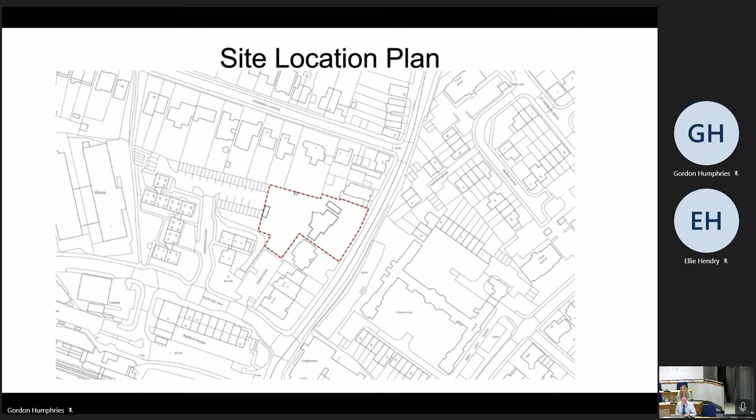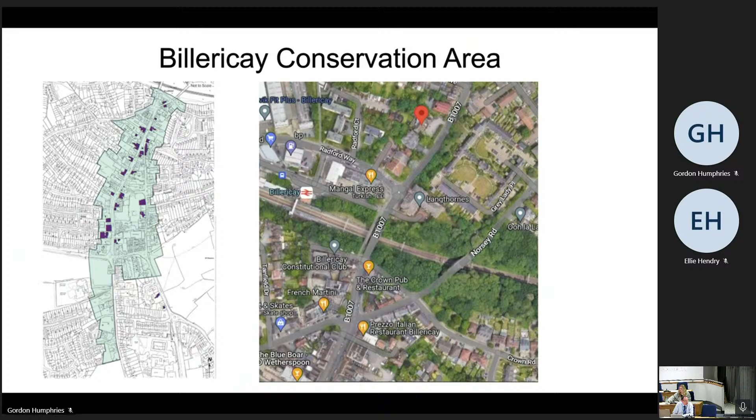So the proposed development - I should say it's a revised scheme to an earlier scheme that was refused by the committee for 30 flats in 2 4-storey type blocks of flats back in April 2023. And the scheme now submitted seeks to address the reasons that led to the refusal of that scheme. The reasons for refusal of that scheme are set out on page 198 of your agenda.

So the current scheme comprises a 4-storey block of flats at the front of the site, comprising 20 1, 2 and 3-bed flats, and a row of 4 terraced houses at the back in a mews type arrangement.

All dwellings will meet or exceed national space standards. 10% would be M4(2) accessible and adaptable dwellings. There's no on-site affordable housing proposed, but an off-site affordable housing commuted sum of £74,400 is proposed to be secured by a Section 106 agreement. A financial viability assessment has been submitted with the application. 13 car parking spaces are proposed, including one accessible space, 2 powered 2-wheeler parking spaces, cycle parking, and electric vehicle charging points to be dealt with by building regulations.

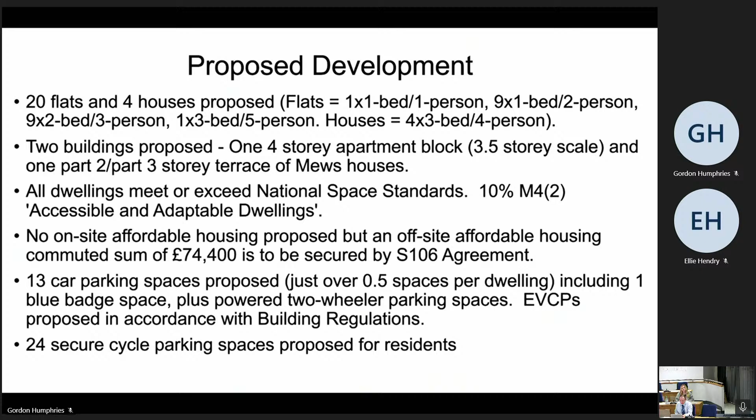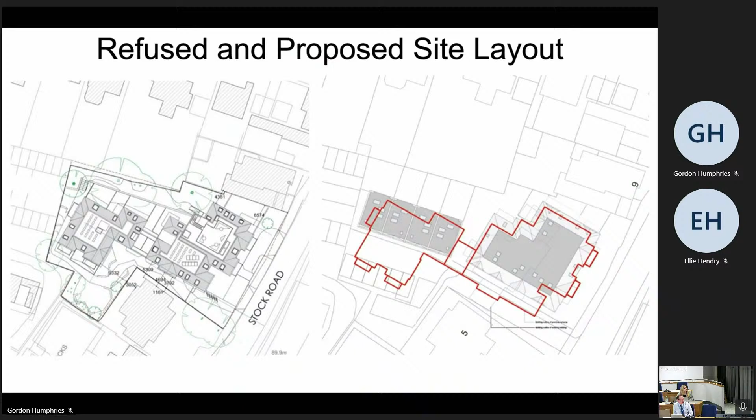One of the primary reasons for refusal of the previous scheme was that it comprised a 4-storey block of flats at the back part of the site, which raised concerns about overbearance and overlooking, and that has now been omitted in favour of those part 2, part 3-storey terraced houses, as you can see there. The block at the front has roughly the same footprint, but it's been reconfigured, reduced in height and design, and set further north within the plot.

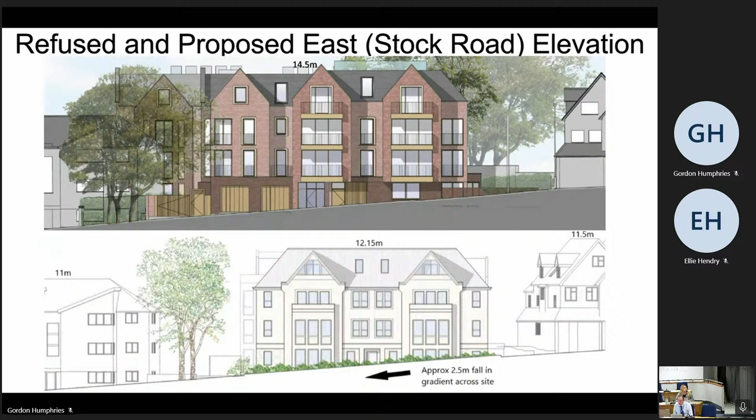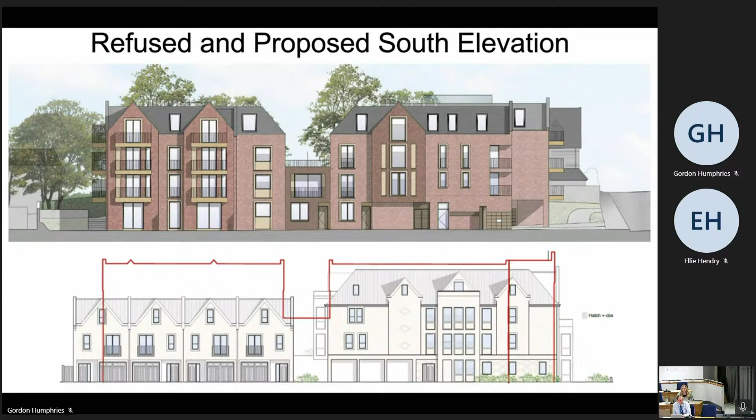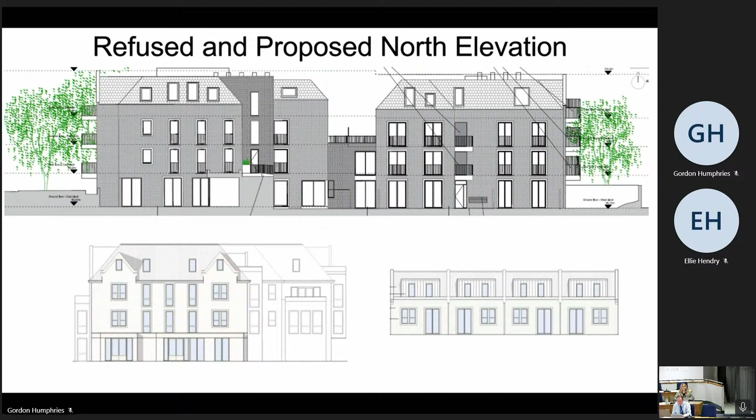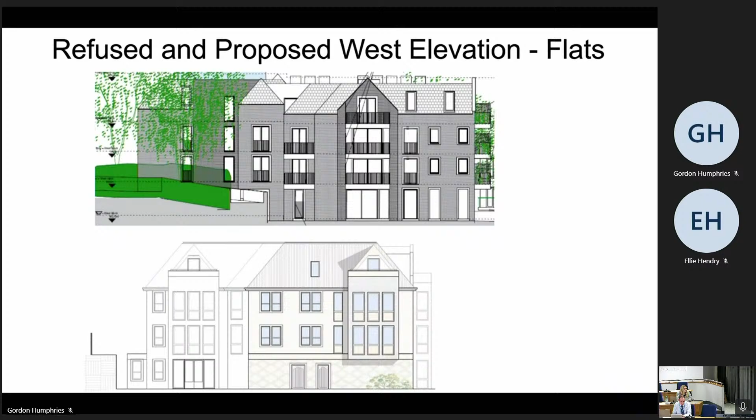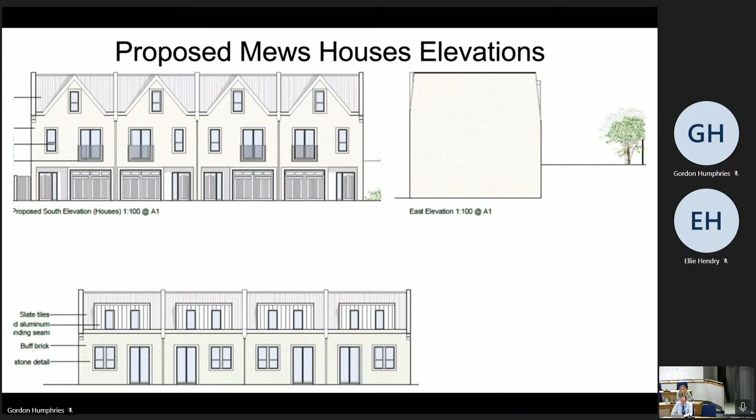And then this is a rear view of the proposed flats, refused at the top, proposed at the bottom. And then this one shows the elevations of the proposed houses. So they would comprise deep garages at the ground floor, and then the accommodation in the floors above.

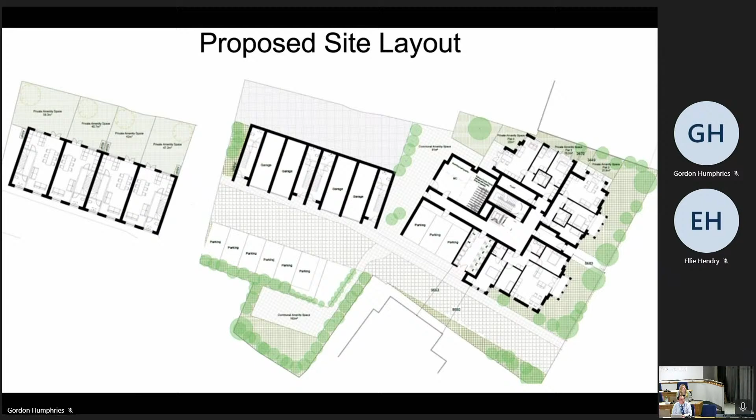So the proposed site layout, as I mentioned, there'll be 13 parking spaces, which represents around 1 for every 2 units. There'll be 1 parking space for each of the houses, which effectively means there'll be no parking spaces for the 1-bed flats, and approximately 1 for every 2 or 3-bed flat in the flat block. I've shown the far left picture there, which shows the garden sizes for the houses, and this is the indicative landscape scheme.

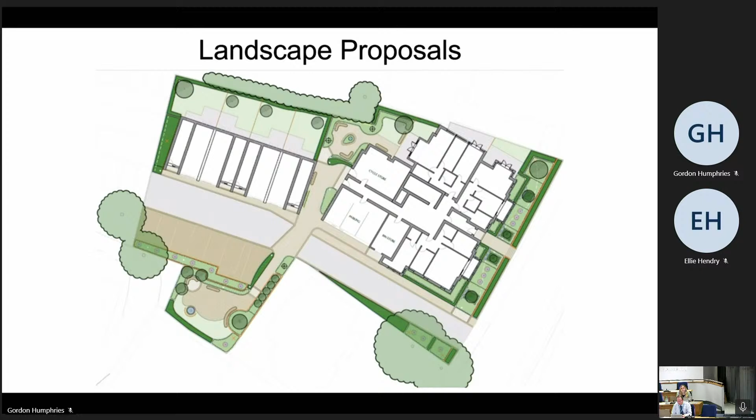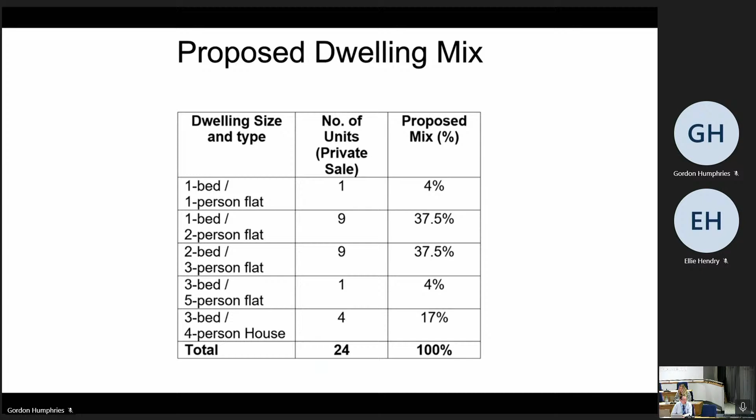Proposed dwelling mix: there'd be 10 1-bed flats, 9 2-bed flats, 1 3-bed flat, and 4 3-bed houses. So 24 in total, as compared to the 30 one and two-bed flats in the previous scheme. So these are the proposed floor plans for the flats.

You can see there's some undercroft car parking for the ground floor, cycle and powered two-wheeler parking also at the back of the flats in the building there. And then this shows the second and third floor. All of the flats meet national space standards.

There was a daylight and sunlight assessment carried out as well, and the majority of units passed those. I think there were a couple of bedrooms in the north-facing elevation of the flats that were slightly below on the daylighting, but they served bedrooms, and the majority of rooms passed, so we were broadly comfortable with that.

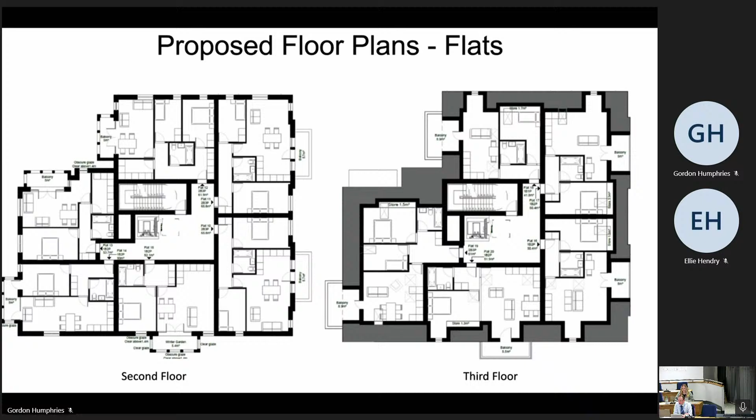And these are the proposed floor plans for the houses. Like I say, they're 3 beds, so you can see the parking at the base there.

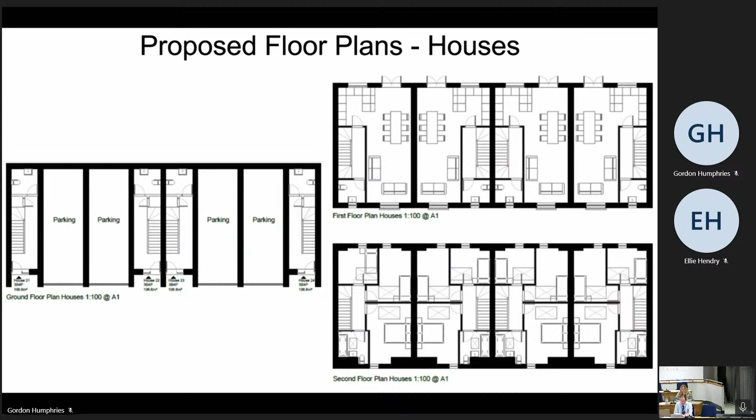In terms of Section 106 contributions, as you can see, the contributions would be sought towards highway improvements, pedestrian access, sustainable transport, healthcare, open space, culture, play and sports, employment and skills, totaling just over £110,000.

£74,400 to be secured towards affordable housing commuted sum. There would be early and late stage reviews as well, so should the viability of the scheme improve, that figure could increase. There's also a condition requested by the Highway Authority that the bus stops at Billericay Railway Station be upgraded. There's 4 of those, each with a real-time information board, which would amount to just under £100,000 equivalent in terms of investment.

These are some computer-generated images just to show it in relation to from Stock Road, in relation to number 5 to the left and number 9 to the right, and again looking from Stock Road in relation to number 9, just so you can see the scheme now drops in line with the falling gradient of the road.

In terms of consultations, over 100 neighbouring residents in the vicinity were notified of the application, together with a site notice and press notice. This generated 1 resident response on grounds of insufficient parking, and an objection from Billericay District Residents Association. No objection was raised by Billericay Town Council.

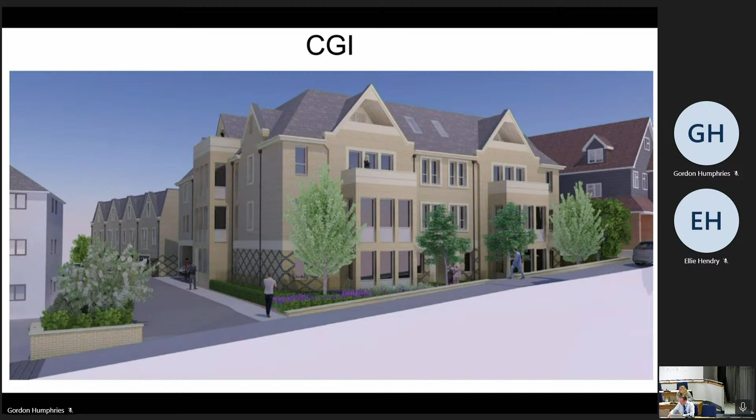So just on the planning balance, to identify the positives versus the negatives. The positives are it would contribute to the Council's 5-year housing land supply, which as you know stands at 2.34 years. This would be a moderate positive from the 24 dwellings proposed. There would be a moderate positive contribution towards affordable housing through the commuted sum provision, efficient reuse of a brownfield previously developed site in an urban location, economic, social

benefits, preservation of the setting of the listed building, biodiversity enhancements, and there'd be bus stop enhancements as well at Billericay Railway Station. So some of the negatives, as I mentioned, the apartment building depth and bulk is still a reasonably bulky block of flats, but we're happy with the design, so I've given that a moderate negative.

Relative short rear gardens to the mews houses, but because of the great distances between that and the rear gardens of Cromwell Avenue, we've given that a limited negative.

Loss of established trees - some mature trees would be lost on the northern boundary, these are sycamores and Leylandii of low amenity value. The arboricultural officer has raised no objection to their removal, subject to replacement as part of a landscaping scheme which would be conditioned.

And the amount of on-site parking, I put that as a limited negative because obviously it's slightly below the one per unit we seek, but because of its sustainable location, we're broadly happy with the scheme.

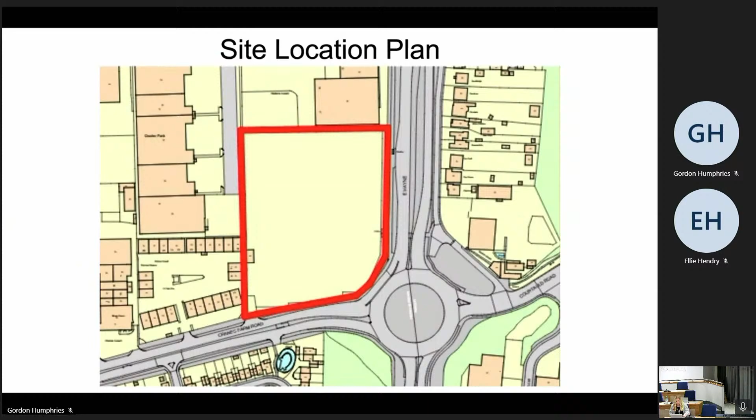In respect to consultations, there have been no objections from highways, no objections from sustainable urban drainage systems subject to informatives regarding flood mitigation methods, no objections from Essex Fire and Rescue, no objections from environmental health, no objections from economic development who have encouraged the use of employment space, no comments from borough councillors, and in respect of neighbours, 26 neighbour consultation letters were sent, along with a site notice and a press notice, and no responses were received on these matters.

In respect of the principle of the development, the wider site is used as a haulage contractor's yard by KE Kent Transport and Storage. The development is retrospective. For the retention of this building, it is used by a stone restoration specialist for the storage of stone materials used in restoring heritage assets, along with a workspace. Therefore, on this basis, it's considered that the principle of development is acceptable.

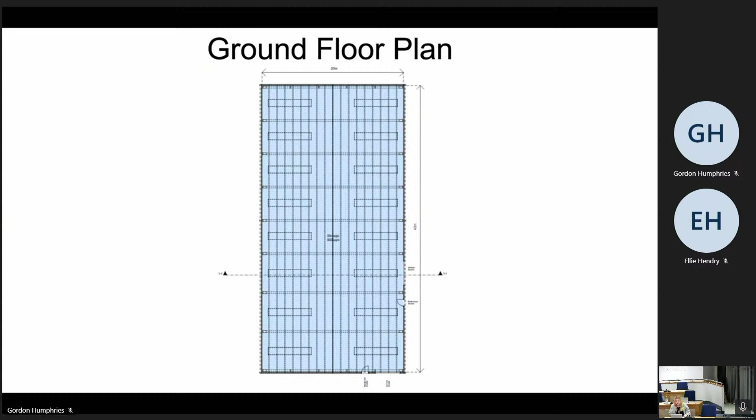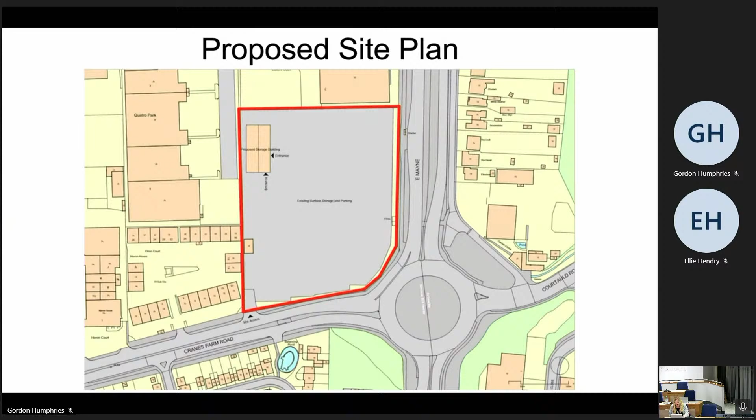So there's the site plan indicating the building and the ground floor plan. In terms of layout, the building is located in the northwest corner of the site, 4 metres from the western boundary and 13.2 metres from the northern boundary. The building is set back 116 metres from Cranes Farm Road and constructed 108 metres from the eastern boundary of the site. In terms of design, the building measures 20 metres in width, 40 metres in depth, and has a pitched roof with a height of 7.76 metres and a floor space, as previously mentioned, of 800 square metres.

As you can see on the plans, the building includes 2 dark blue entrance doors - one of each door is located in the southern elevation and the other doors are located on the eastern elevation.

The building is finished with metal cladding, and the size and design of the building would be similar to other commercial units within the area, and it would be viewed against the backdrop of commercial units on neighbouring sites to the west and to the north. It's therefore considered that the design and appearance would not detract from the character and appearance of the surrounding area.

It is considered acceptable. In respect of noise, pollution and general amenity, given the commercial nature of the site, the application does not give rise to any noise or general amenity concerns, and it's considered acceptable in this instance, and as previously stated, environmental health raised no objections.

In respect of highway safety and access, no changes have been made to the existing access arrangements nor to the parking arrangements on site. The existing space is considered to serve sufficiently to the building, and as such it would not result in material harm to highway safety.

In respect of flood risk, the application site is within flood zone 1, which is the lowest probability of flooding. The lead local flood authority have raised no objections, but as previously stated, we have added an informative regarding flood mitigation measures.

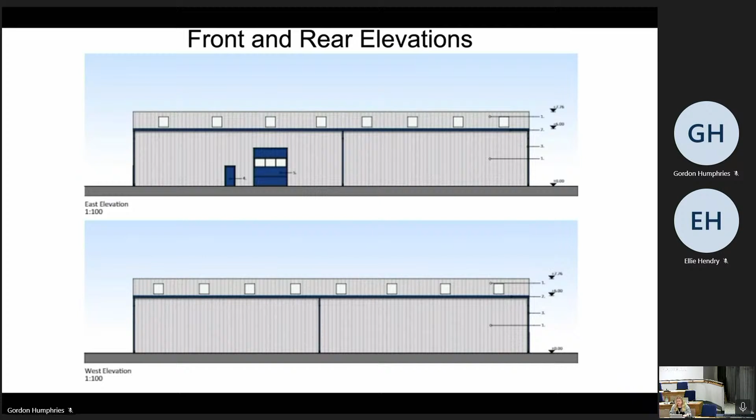Thank you, Ellie. Have we any clarification points? Councillor Myers. Thank you, Chair. How long has it been there? I'm not sure exactly how long it has been there for.

Councillor Myers, this was picked up through an enforcement inquiry. All we know is the enforcement case was opened in March this year, but that's all I can tell you.